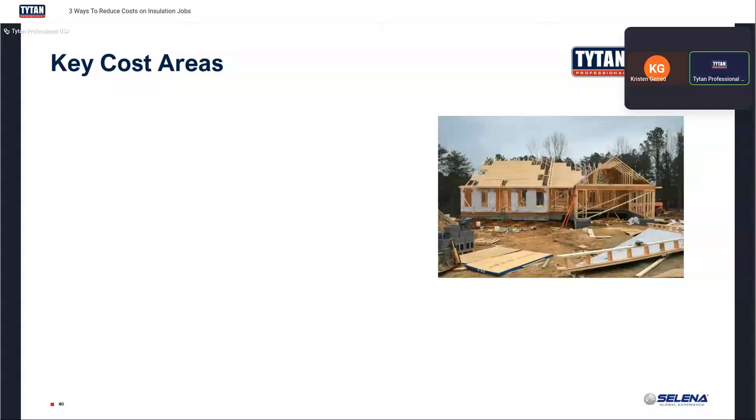Okay, so for insulation contractors, if you think about it, where is most of their cost for their job? Where most insulation contractors are carrying costs, you can see it's labor. Labor is a big one. Obviously, you got to have a crew applying this stuff. Maybe for one job, you might need 2 installers or 10 installers, depending on the project. All the supplies involved, so that includes PPE, products like ours, all sorts of different supplies.

And then if you're having to go in and do any rework, like I mentioned, or fixing up stuff that didn't pass the inspection, that's a huge cost. You're starting to really eat into whatever margin you had for that job. That's kind of a pain. And so areas we would recommend you consider if you're looking to save on cost for the job, one of them would be getting the right training on the product use. Our products are pretty straightforward to use, I think. But getting that right training involved, understanding the right techniques to use.

A big one is picking the right product for the application. I've seen jobs where people decided to use fire block foam throughout the whole house everywhere instead of window and door foam, and that caused problems. They had to go back in and tear out the foam and put the right foam in. So you want to pick the right product the first time, and then you obviously want to pass that inspection. And so if you do all that, you're going to save a lot of money, because any fixing or rework is really going to eat into your margins, like I said.

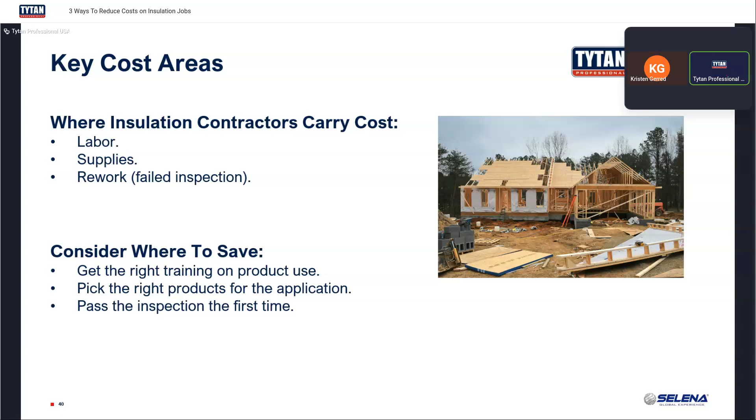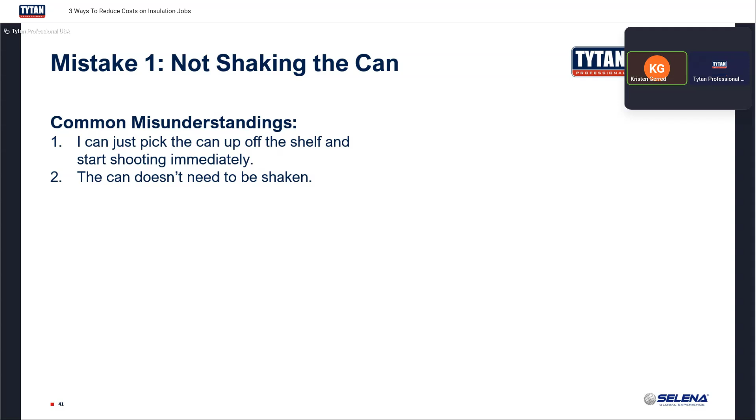Okay, Kristen, could you walk through this one? Yeah, so one of the mistakes that are often made is not shaking the can. The common misunderstanding is that you can just pick it up off the shelf and start using it immediately, that it doesn't need to be shaken. And this also occurs when somebody is using it and then they set it down to go to lunch and they come back, and the can also needs to be reshaken after that period of time.

And so you can see this image here on the right where this is what it looks like inside of the can. So the gases sit heavily on the top, and if you don't mix it completely, the product composition does not behave correctly. So in order to avoid this mistake, which causes the material to not cure properly, not behave properly, the components inside the can need to be shaken for 30 to 45 seconds to fully mix the materials inside. And as I said a second ago, if the components are not mixed properly, the foam does not cure properly.

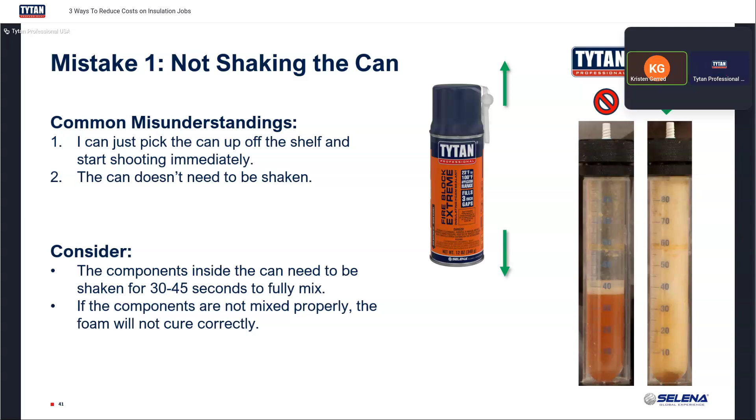There's times where I've seen it cure unevenly or not cure at all, or create a lot of holes within the material. So, again, the first piece here is to ensure that you're shaking properly. And reshaking, if you take a break, is very important.

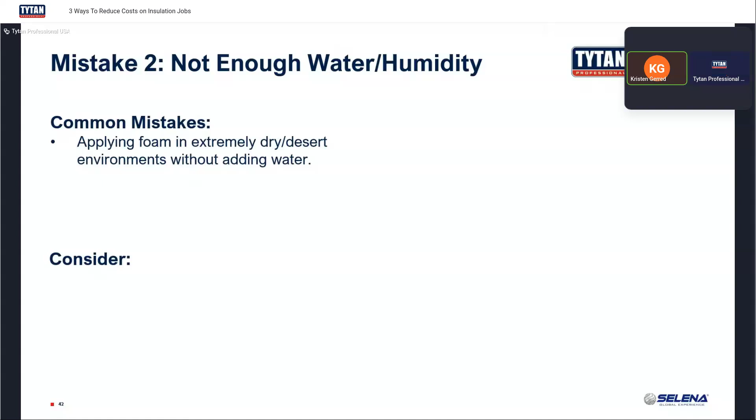So mistake number 2 is not enough water or humidity. Our products cure by moisture in the air. So if that moisture does not exist, then the foam does not cure properly. So if you're applying foam in extremely dry or desert environments without adding water, you can see on the right how it causes a lot of holes in it. Again, this will also cause certain parts to maybe not cure at all on the very inside.

And we see this even if you're in an enclosed space, even if outside has a high level of humidity, but you're doing a job on the inside of a building that has no access to any sort of moisture, the material might not cure properly. So

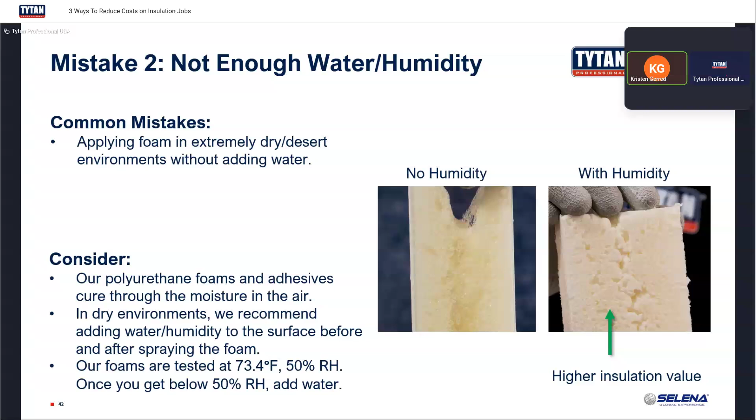it's recommended that you spray a light spray of some sort of water to the surface before and after spraying the foam. Our foams are tested with about 50% relative humidity. So once you go below that amount, it can cause the formula to not behave as it should. And then that's where you'll see if you start cutting into any of this material, it's got a lot of holes and it's not maintaining its structure properly.

All right. Thank you, Kristen.

Okay. Yeah. So some other mistakes that can kind of cause some problems. I mentioned picking the right product, but not using the right technique can cause an issue as well. And so sometimes people are trying to insulate a gap in the wall. Maybe it's a pipe penetration or something, and we'll look at a picture here in just a minute. But typically you want to fill the gap from the bottom up. One issue is that people try to fill gaps from the top down and the foam can just fall.

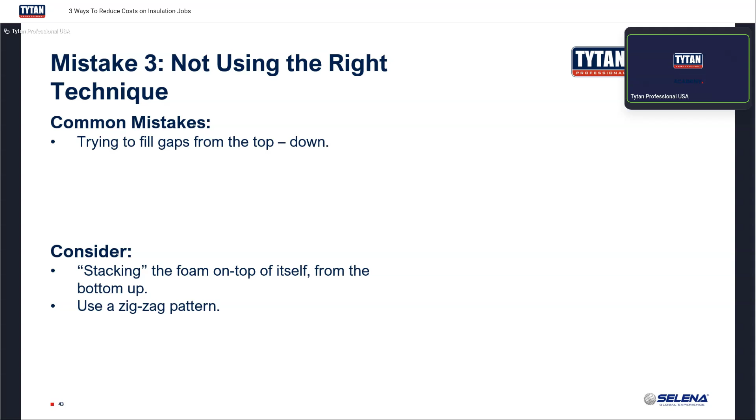So the best term we can use is you want to stack the foam on top of itself from the bottom up in kind of a zigzag pattern. Because the foam typically needs some kind of base to rest on. You can't just spray it into some bottomless void. If it's just a small amount of foam, sometimes you can, but if you're trying to fill a big space, you want to fill it from the bottom up.

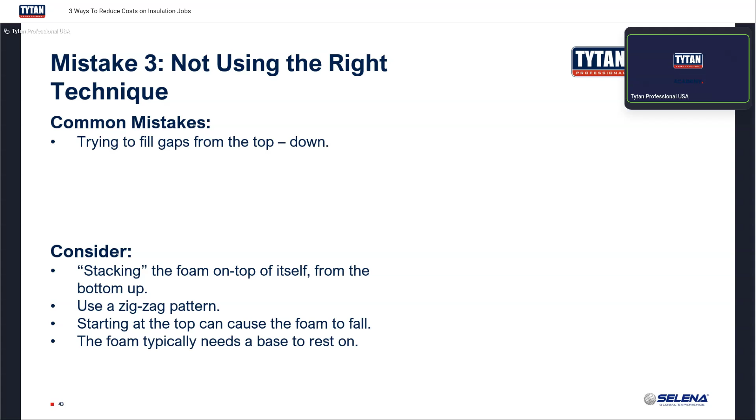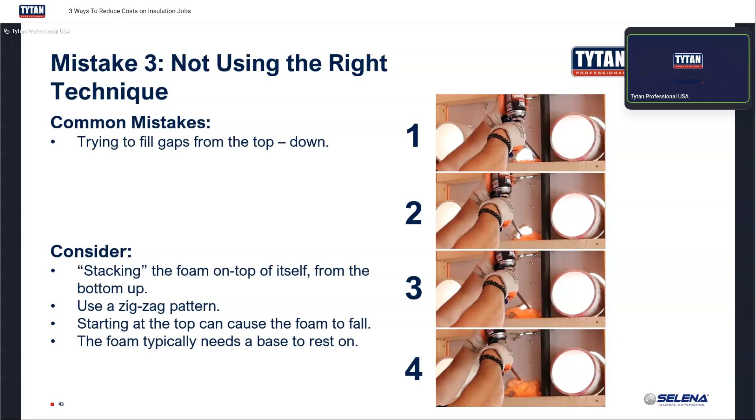So another one is using inefficient systems where, you know, if you use a system that's a little bit more efficient, you can reduce the cost. And so a lot of professional installation crews are still using these 2-component foam systems. And, you know, you can get these at a lot of hardware stores. So the issue you run into is when you're trying to insulate a smaller space, maybe less than 500 board feet or less than 200 board feet,

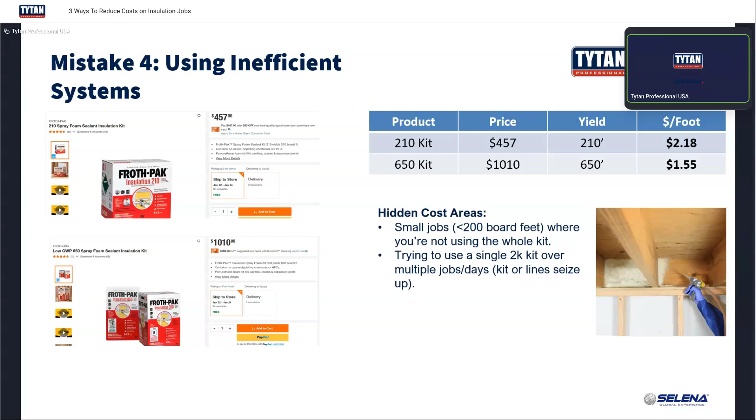where you might not use one of these 2-component kits. You might not use the whole thing. You might have some left over and you have to throw it away, or you want to reuse it the next day and the lines seize up on you. And so we developed this thermospray product. It's much lower cost per board foot, and it's just more efficient from job to job. You can replace and or repair 2-component foam systems with this product, which is pretty cool.

Okay, so that's it as far as mistakes that can kind of cause increased costs. So if you address these mistakes, you could definitely reduce your cost per job.

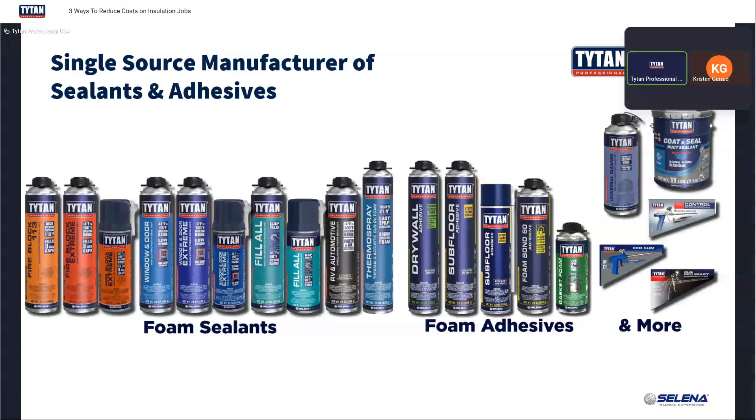All right, so thank you everybody for watching this webinar. We hope you're able to follow some of these tips and reduce your cost on your construction jobs, and then you can keep a little bit more money at the end of the day for your installation work. If you're watching a recording, thank you.